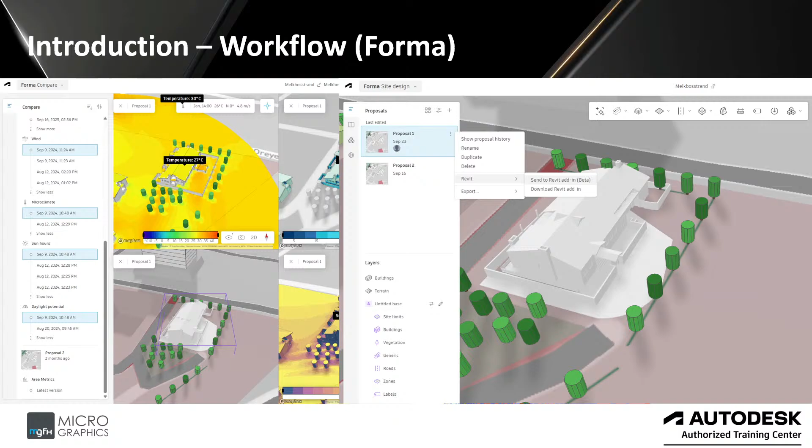Here's an example of the different types of analyses that one would be able to do. This is what it looks like within Forma. You're able to compare different proposals as well if you decide to make a change to the building, to change the orientation, the placement of the building. What would the different factors be like on your site?

Top left, you see the temperature, then the source score. The second one shows how much, what type of glass one would have to place, what's the best use, what type of glass. Then you have the solar power, how much kilowatt hour per square meter you could generate if you placed solar panels on the roof, for example.

Then you have your area metrics at the bottom left. Then you have your sun hours at the bottom middle, per day—you select the day and month of the year, and you can see how much sun exposure you get. And then your wind speeds, in meters per second.

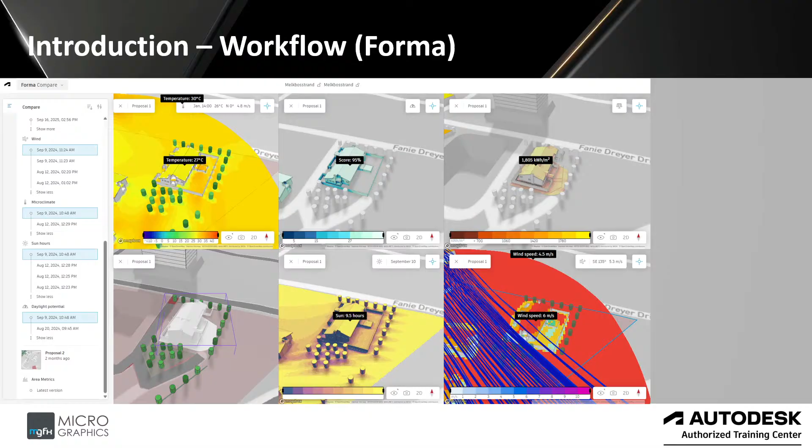So this is how I would suggest one would do it. You would go into your Autodesk account. If you have the AEC collection, you would go look for Forma, and you can access Forma through your Autodesk account.

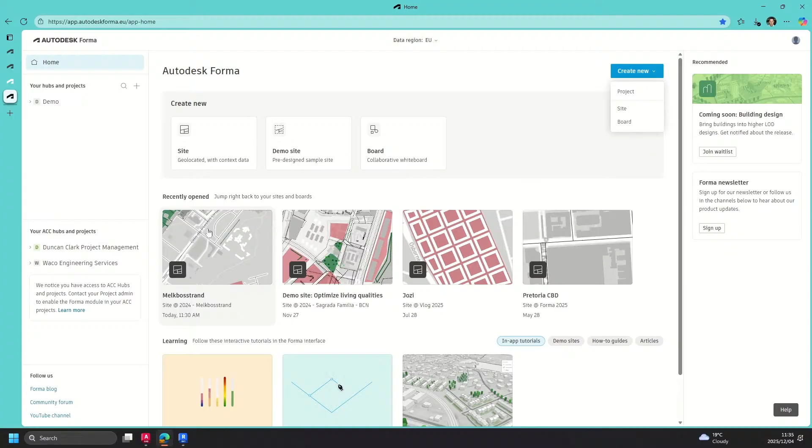I have saved my Forma as a favorite on my favorites tab. You have your hubs, your projects, and your regions which you are part of. So you either get invited to a project or you create your own new sites, demo sites, new projects. And then you have your recently used projects, all connected through your Autodesk Construction Cloud Docs hub.

You can create multiple proposals, as many as you require, and design the different types of buildings that you need. If you want Forma's default line building, basic buildings, you can, or you can sketch your own in 3D. I've placed all the different types of buildings here just to show examples of what you could do.

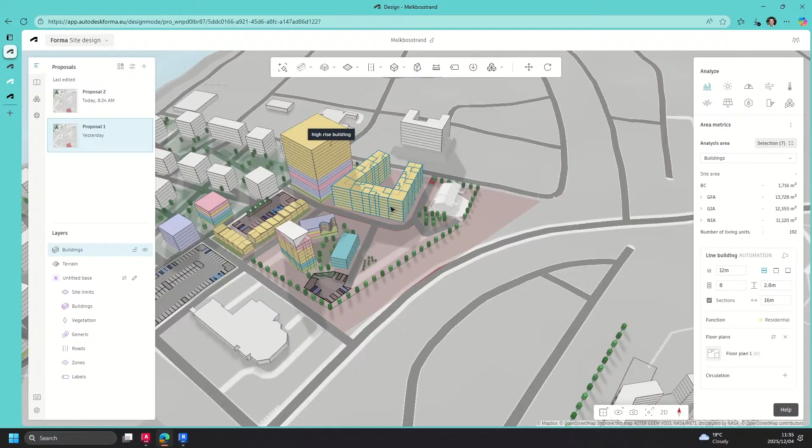Within your buildings, before you even start with your Revit detailing of your structure, you can draw your own layouts, and get an idea of what, where you're heading.

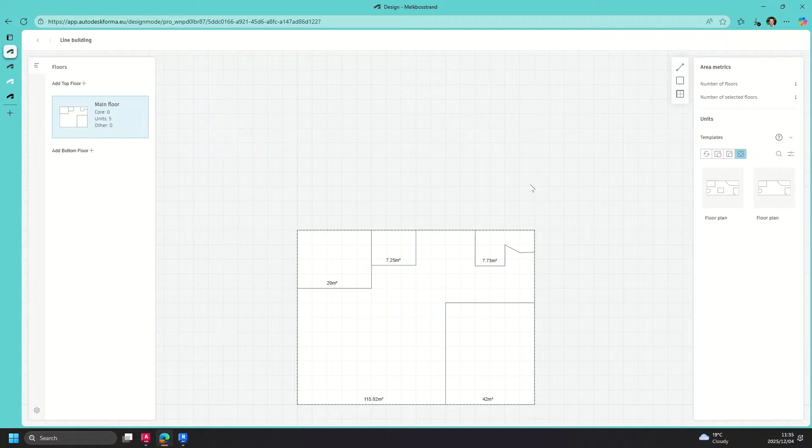You can place multiple different iterations of floor plan types, window placements for the best orientation, best sunlight, those kinds of things, and then it models it for you in 3D. Once you send this to Revit, those lines that I drew become walls, actual 3D components in Revit. You can swap them out for different types of walls.

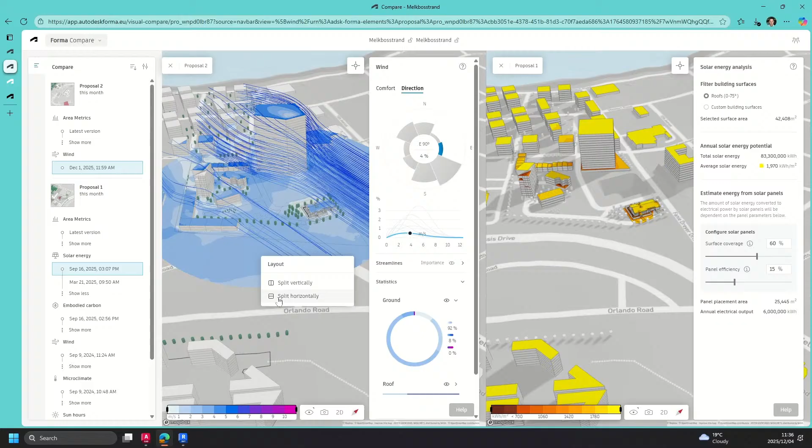Here's an example. I'm taking my proposal 1 and proposal 2, two different designs, and comparing one versus the other, one to the left and one to the right, to see how the factors were updated when I made a change to my building. You're able to right click and split the screen to add more analyses to compare and view.

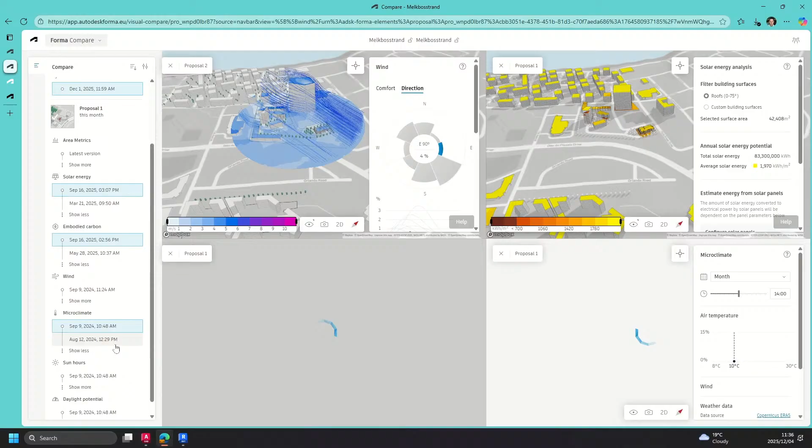There's your solar energy, how much you could generate. Selecting just that building, how much energy can you generate on average. On the left we have our wind. There's an inspect tool, so you can place spot inspections to see what the wind conditions would be like surrounding your building, on your building.

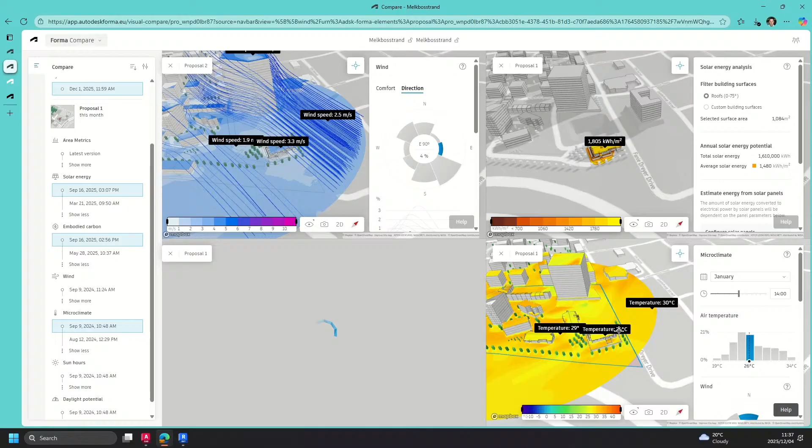And this is all pre-conceptual stage, right? There's no design yet. It's just an idea of understanding the site first.

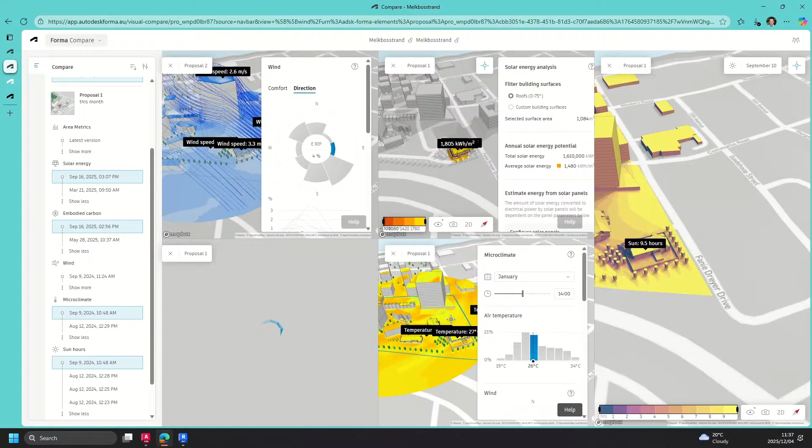Then we have our sun hours. On September 10th, you have 9.5 hours of sunlight on that roof. The temperatures will be roughly 27 degrees. This is based on your local weather data systems. So this is done in Melkbosstrand on the Western Cape coastline, South Africa.

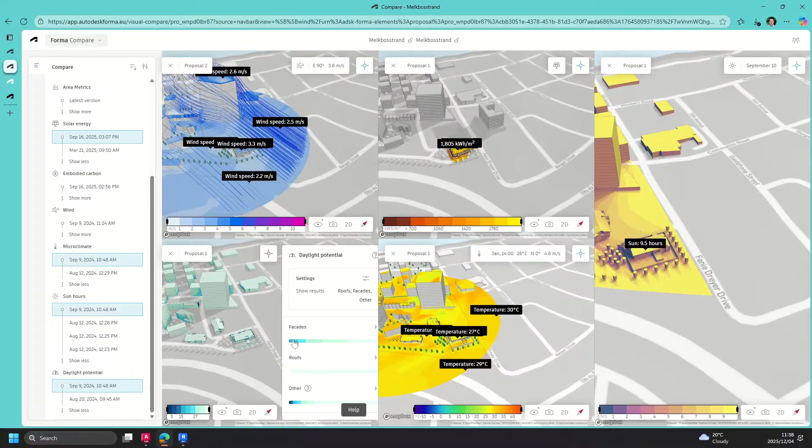Daylight potential is based on roofs and facades to see what it's like. At the bottom there's a score that shows you conventional window designs should be satisfactory. So single clear glazing should be satisfactory there, no need for double glazing in the type of temperatures that you receive there. It doesn't go into the minuses with snow and those kinds of things.

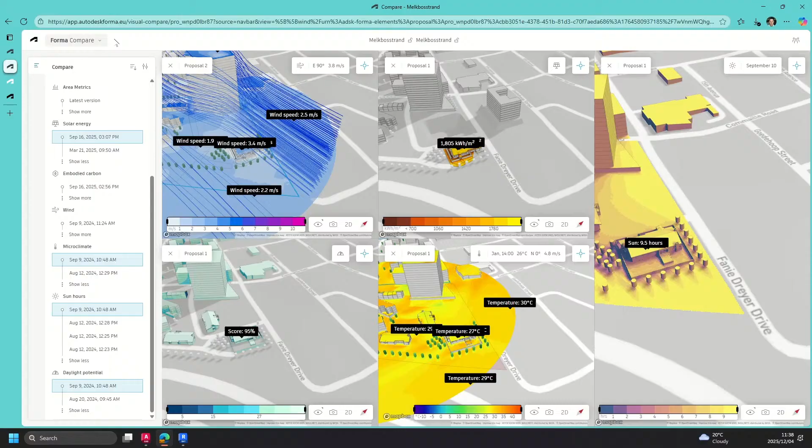Going back to the site design, with the drop down there's the add-on. You can download it there and then send it to Revit. On the right hand side is where you select which type of analysis you would like to do.

There are also additional extensions that you can download for free, a lot of them are for free. That's an example of the parking metric test fit, which designs parking spaces for you using AI.

There are some of the ones that I've already added. And if you click on add extensions, you can go look for other ones that are available. These are just the defaults that are here, but you can go to the Autodesk App Store online and look for more.

ArcGIS information, generate 3D building design options with the most advanced 3D generative AI, ArchiStar. So it generates the buildings for you with your inputs. You say 3-story building, office block, that kind of prompt.

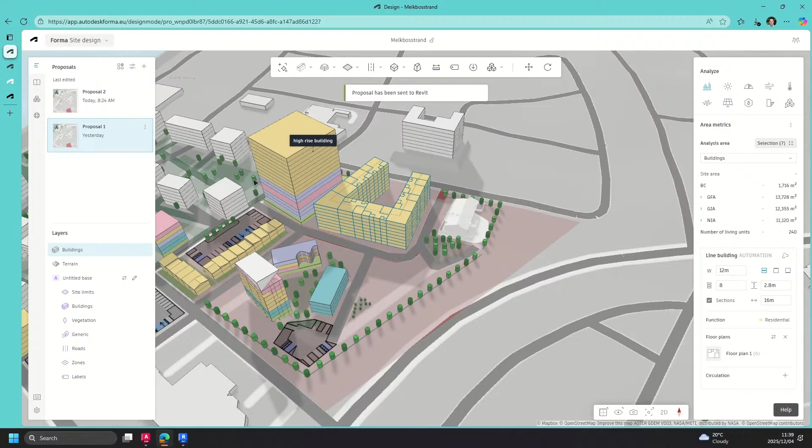And then there's Veras, which is a brilliant AI visualization tool for short videos and still images, which I will show you during this webinar. So let's send this to Revit, and then I can show you what it looks like once you've loaded it into Revit. That's the end result.

That is where you would find it on the Massing and Site tab. Once you've added that plugin, you can load the proposal into Revit from Forma. You can also update the proposal, and you can also unlink it once you're done with your analyses.

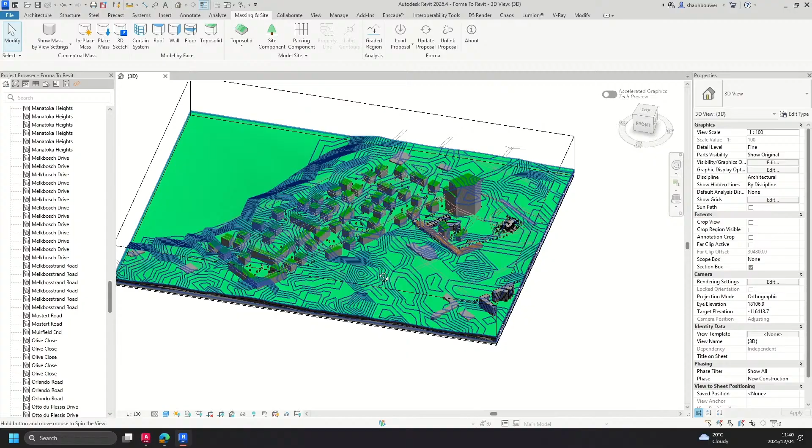What is quite brilliant is it brings in contours and everything already. So before you have your site surveyor sending you data for contextual information like the contours, how the site falls, what the conditions are like, at least you have a really good starting point, right?

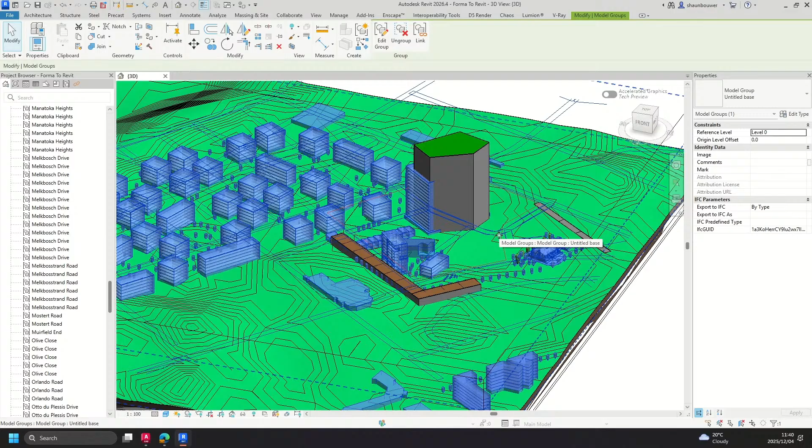At this point, it would bring in roads and existing buildings by their name in groups. So you can decide which ones you want to keep, which are relevant, and then you can remove the ones that you don't want.

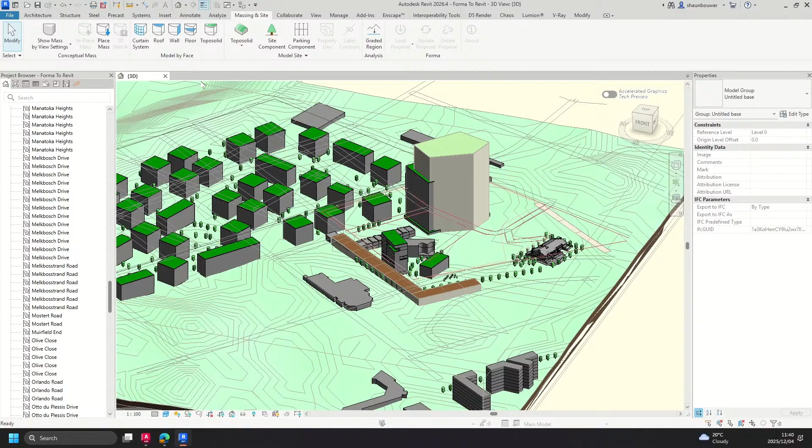And then what I did as one small example there on the right hand side next to the house on the far right, I made the roads that I brought in an actual path, an actual road in Revit. So I converted it using the pick line tool, so you can then model the street and the landscape inside Revit.

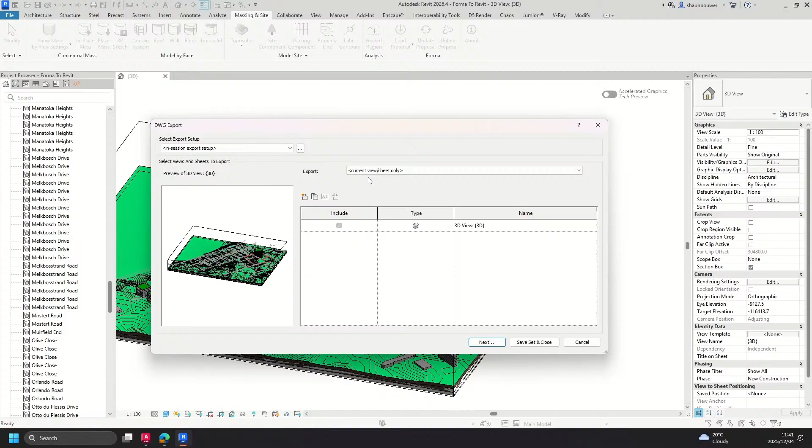With that, then you can send it to DWG format, so you can use it in AutoCAD, Civil 3D, or other software packages for further development, cleaning out the contours, making it look nice and neat. You have control over the layers, assigning the layers to them.

And then that's what happens. In AutoCAD, this is an AutoCAD example, and I'll use Civil 3D for this example.

Place your geolocation, go search for your address, where the building is. You have different map views you can select, street maps or satellite imagery. Edit your location to be exact, make sure you're selecting the right place, and select the correct coordinate system. I used the Hartebeesthoek coordinate system.

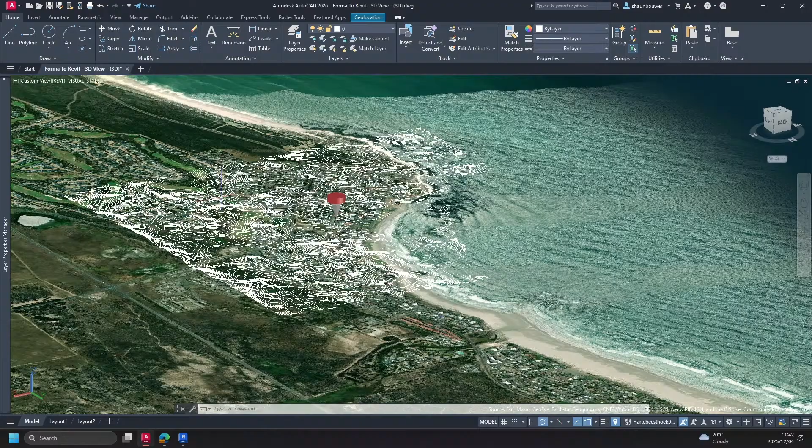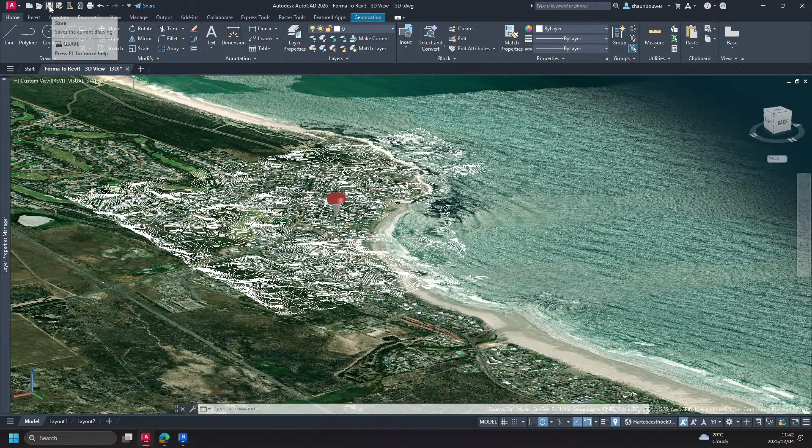With this, you have a really good start without having to have multiple consultants working on the same thing. I did this all by myself. So the idea is you can start with a very nice base point, having the right site data, understanding what the winds are like, the sun exposures, all the environmental conditions, and you're ready to kickstart your sketch plan or design phase.

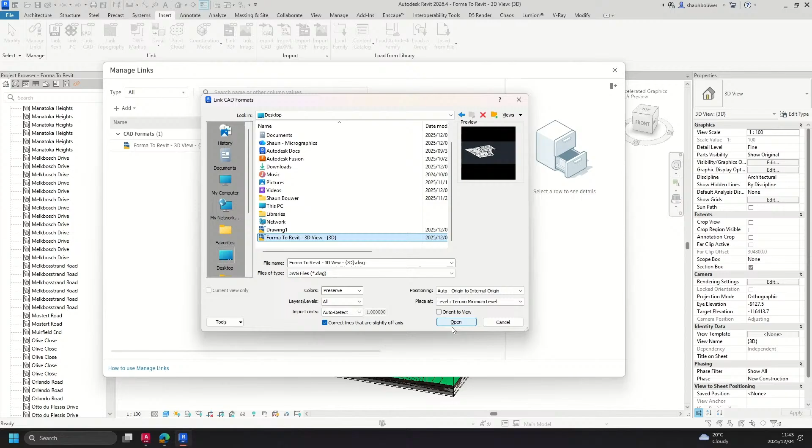Once you've made your changes in AutoCAD, you've updated the layers, cleaned it out a bit, just cropped the area that you require. You might not need the entire Melkbosstrand as an example in this project, you don't need the entire city, you just need your block or just your erf. Then you can go and crop it out.

When you reach this point, one would want to start creating a centralized model, right? You want to save it on the construction cloud. You have the choice within your network or in the cloud. I'm doing it within the cloud so that we can connect with multiple users from multiple different disciplines and software packages collaboratively, wherever they are sitting, whether they're on the same time zone, same continent or not. We can all work together on the same project at the same time.

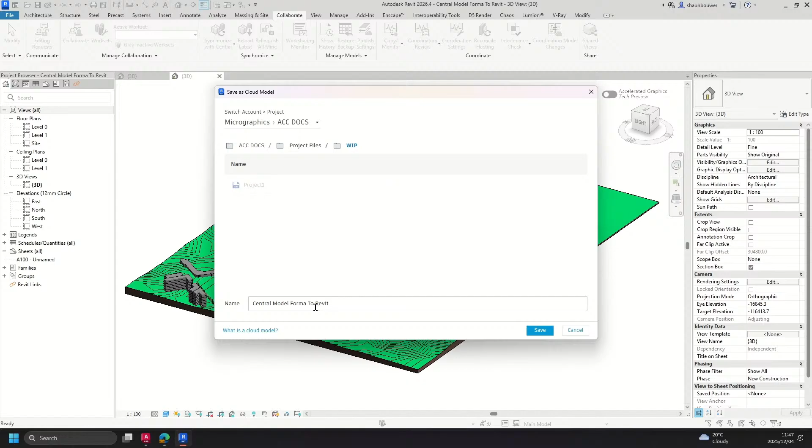Okay, select your hub and the project. This is my Autodesk Construction Cloud Docs Forma example project. So I'm just creating a central model, a centralized cloud worksharing co-author model, so multiple people can work on the same model at the same time.

With that, we have a cloud model. We can go create worksets now. You can do this before the time or after the fact, and you can add a few worksets. Give every discipline or team member a workset by category, it's up to you how you define them. I prefer doing it by discipline, so every discipline has their own model to work on, or their own workset to do their part.

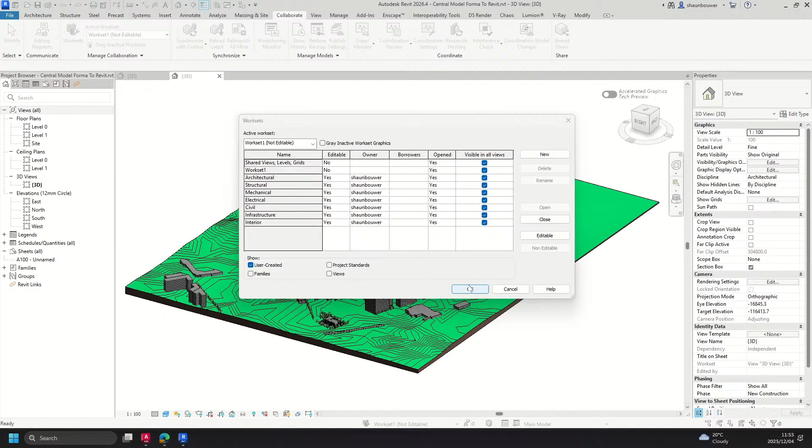So architectural, structure, mechanical, electrical, civil, infrastructure, and interior. For this, I will do the architectural part. And there we have our base model.

Now what one would do is each discipline would have their own model. All of them can be linked into the main model where maybe the topography lives, or you can use the architectural model as the main model, depending on your circumstances, scope and project needs.

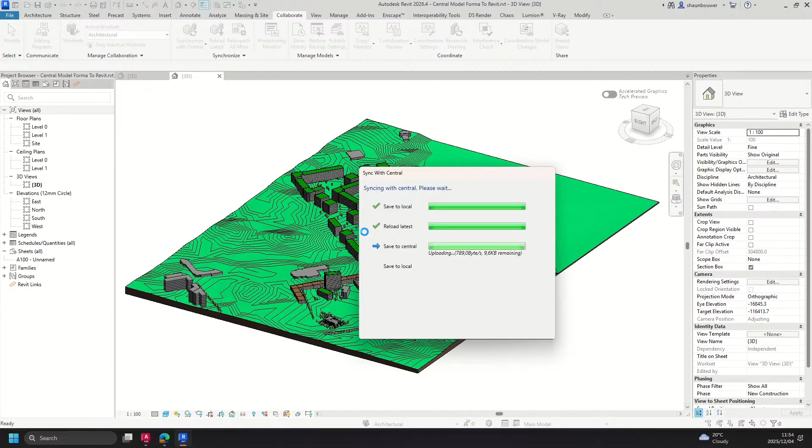And then each person can go within their own worksets and their own models and start collaborating. So here's my architectural model. I further defined what I did with my conceptual mass that came from Forma, and I converted those walls and elements into actual Revit geometry.

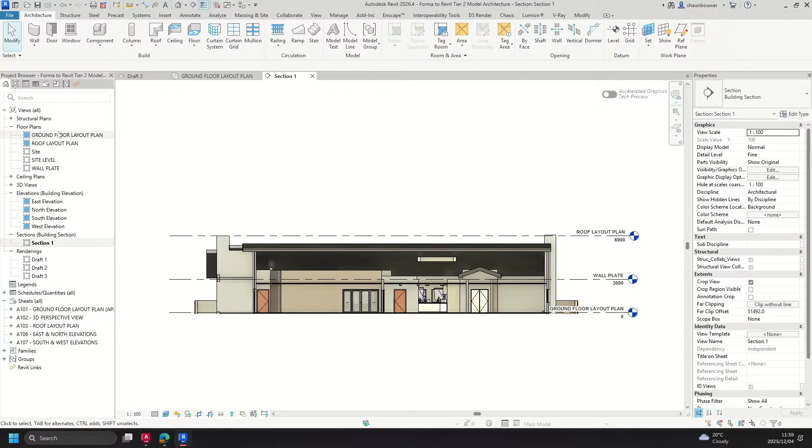And here you have an example of your building. So instead of it just being a shell, we have all the internal elements as well. Then you can do a nice draft render in Revit using the Revit renderer, or you can do cloud rendering as well if you need be, or Twinmotion. It's an option, now available within your AEC collection.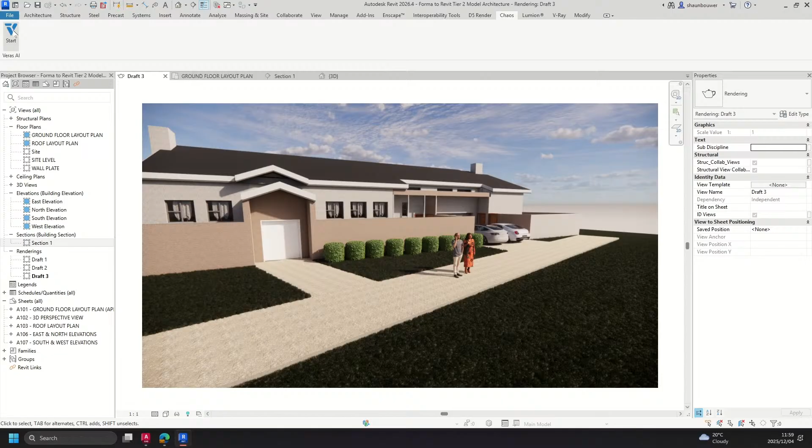Then you have additional ones: V-Ray, Lumion, D5 Render, Enscape, and so on. But for this exercise, I'll be using Veras, which is from the Chaos Group and Evolve Lab. It's an AI tool that does all the settings for you for the rendering. You basically select an image that looks like the way you want it to look, and you click render. That's about it, so it's a very, very easy, quick tool for pre-conceptual design things.

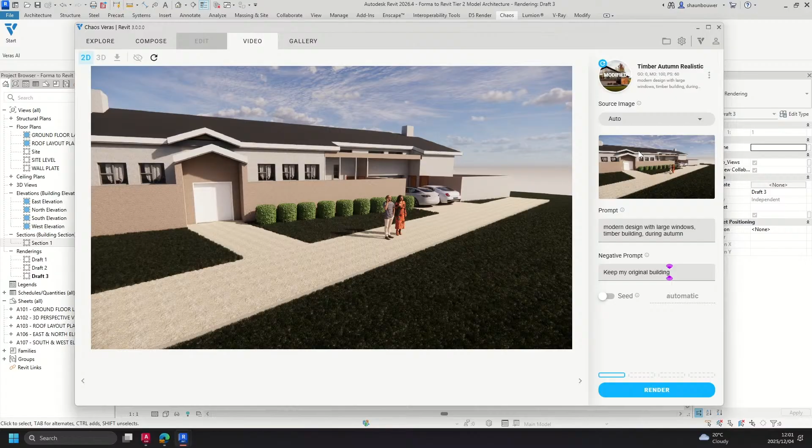If you're on the Compose tab, you do have the option to do a prompt, the way you would Google search or talk to ChatGPT. You just type in a prompt, what you want, and a negative prompt, saying what you don't want changed. So I said keep my original building. You can add more geometry if you ask it to add more things, and you can just specify it in the prompt. Here are some examples.

These renders just take a few seconds, usually between 5 or 10 seconds, and it gives you a really nice idea of where you're heading. And all of this started with just a conceptual mass in Forma.

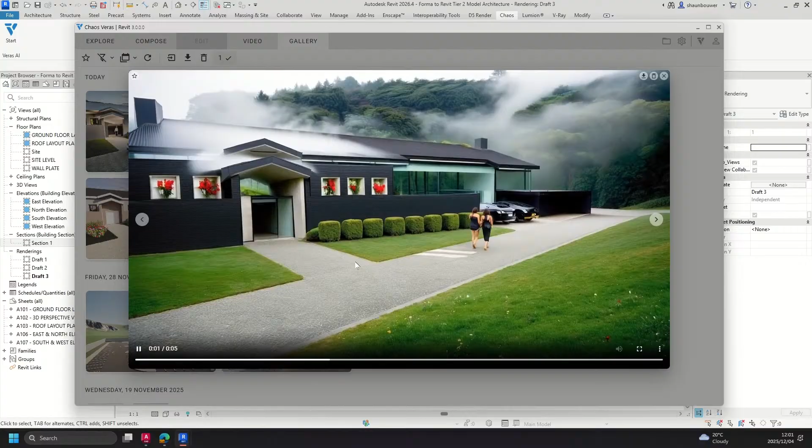So within one day, you already have something to present to the client saying, this is where we're heading. Are you happy with it? Is this the look you're going for? But more than that, you understand contextually what the site is like, the environment, the sun, the wind and the microclimate in your specific area, geolocated data based on actual weather data systems. And this is all run with AI.

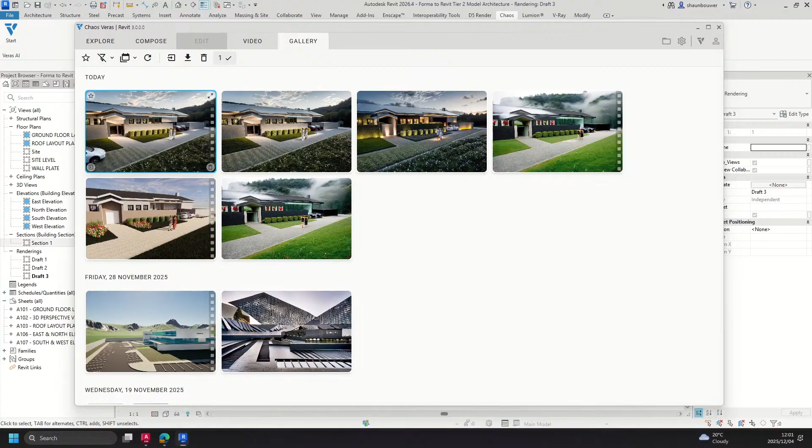So it's quite brilliant how quickly one can get to a conceptual stage, which used to take much longer. We would go to site and do a lot of calculations and things there on site. Alright, then once you've reached this point, you would have all your different formats and files linked.

Your Revit files for the different disciplines, or your DWG files for multidisciplinary coordination. Now it's time to develop your BIM project in Revit with construction documentation, doing interference checks and aligning the different disciplines with a cloud model to keep everything coordinated.

So once detailed construction documentation, all disciplines are complete and ready for construction, then one would use that visualization tool to generate more accurate representations of your building. With Veras, you can do still renders, panoramas, and videos, and it takes seconds with Generative AI.

So looking at this construction documentation slide, these are the different types of detailing views that are available within Revit. You get floor plan views, ceiling plan views, elevations, sections, callouts, drafting views, detail views, and 3D detail views.

And for floor plans, those are horizontal cut views through the building. The level of detail generally is from coarse to fine, depending on what you're trying to show. The use cases would be general layouts, floor assemblies, finishes, and fire ratings.

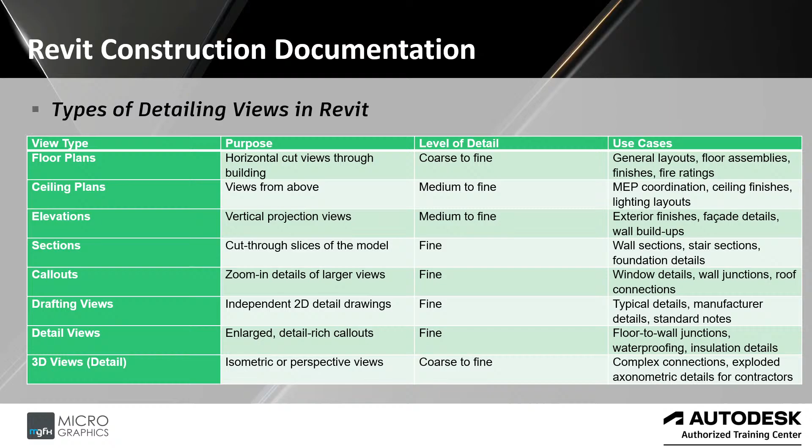And then 3D views for isometric or perspective views from coarse to fine. Okay, so here are 3 examples of the different types of views when I referred to the drafting detail view and callout view. So the functions and tools for detailing Revit.

While views are important, the real power lies in the detailing tools that Revit provides. So what you actually have to place them. We have detail components, line work tools, which are the same as the draw and modify tools within AutoCAD, filled regions similar to the hatch patterns in AutoCAD, detail lines, tags and annotations, keynotes and keynote legends, detail groups, drafting views, and then view templates and filters, and detailing in 3D.

So to the left there, you would have just that would be the detail view. So it's a drafting view. So it's not connected to the actual building. You would draw all of those elements using repeated components or in-place components that you would draw in 2D.

Then you have the middle one, which is a call-out view. You would go and zoom in on a space, crop it out, and use the 3D geometry and then place 2D elements on top of it to resemble, like for example, the rebar and the connection. Add your multi-leaders, your specifications, your annotations, dimensions, and so forth.

And then you also have the ability to do text and multi-leaders in 3D. So you can go do a section box, save your 3D view as a different view name. For example, this could be the 3D staircase, multi-story staircase, and then you can place text, which is nice to see on site for the contractors, what it must be like in 3D.

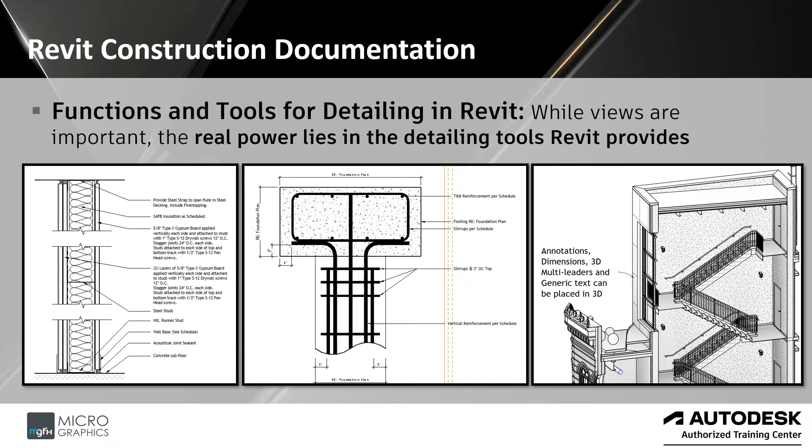So the introduction workflow is ACC plus Revit plus CAD. That's the life cycle. Forma can be accessed through your Autodesk Construction Cloud Docs account. Members can be invited, and the project can be shared between all relevant members. Forma is an online application and no installation is required.

The minimum requirement is access to the AEC collection and an invitation to the project, whether you're creating a project yourself or being invited to one. Using ACC with Forma, Revit, AutoCAD Civil 3D, Navisworks, and the other AEC collection software helps you collaborate effectively.

It's about aligning your designs, right? So within Revit, instead of using your open model or new model option, you would use your Autodesk projects to the far left of the screen, and that is where all your cloud workshared models would live. For everybody to gain access, whenever they open it there, they will create a local copy of the central cloud workshared model.

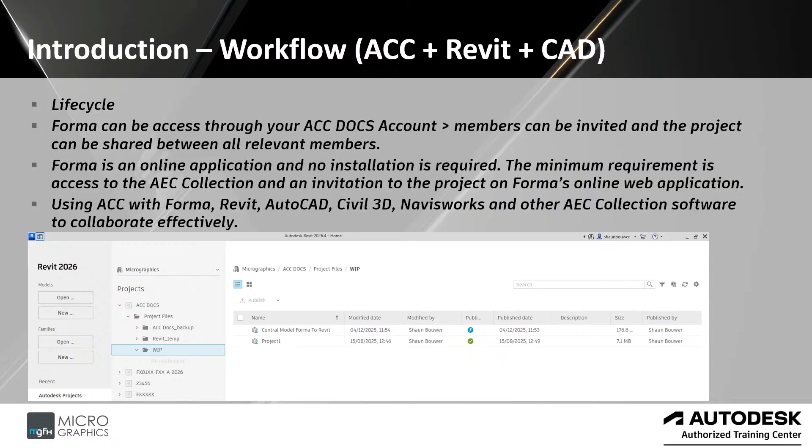AI-powered design in Autodesk Forma - the generative and AI design driven features. In addition to its intelligent analysis tools, Autodesk Forma now includes an incredible AI-powered rendering feature, which I showed briefly. Now within Revit, it is also available in Forma. So both of them, the use is the same.

The new capability uses AI to generate photorealistic renders directly within the Forma environment, instantly transforming simple massing or conceptual models into realistic scenes, complete with materials, lighting, and context. What makes it so powerful is how it integrates seamlessly with Forma's real-time environment analysis tools.

As you adjust the building's form, orientation, or materials, you can see not only how the performance changes, but also how it will look in the real world. By combining performance data and visual intelligence, Forma allows designers to communicate ideas more clearly, gain stakeholders' buy-in earlier, and maintain sustainability as a central focus before a single line is drawn in Revit or AutoCAD. And because everything connects smoothly into Revit, the AI-generated design intelligence carries through to the entire BIM process.

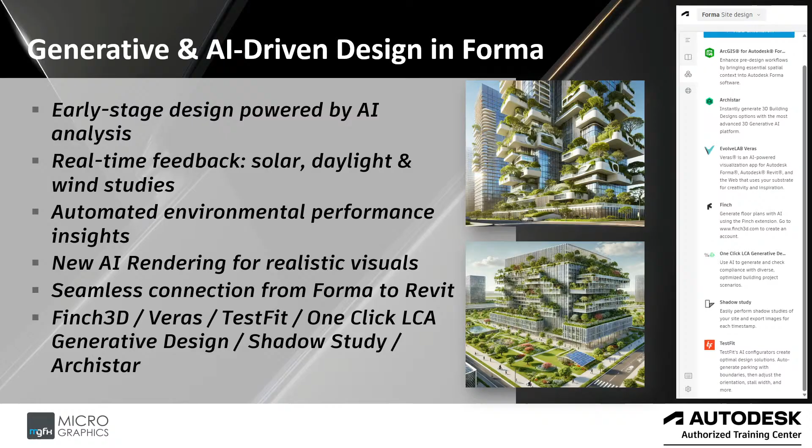Here's an example of Veras inside Forma. If you run Veras there, you can also try the trial out if you just want to see how it looks. So to the left are my buildings - I didn't draw a single one of them. I used AI to generate all of the buildings for me to the left. Some of them are existing buildings of the actual area that I selected on the map, and some of them are generated by input of the AI. I think it's called ArchiStar - it generates it for you.

As I mentioned in the previous slide, this is just an example of Veras from the Chaos Group and Evolve Lab, which generates fast renders - it literally takes seconds, with possible scenarios based on your prompts and input. So I asked for one based in the fall, so it would use this sort of color scheme. Then you can input multiple different prompts, and do multiple renders at once - you can do 4 at a time.

And with this, you can share it with your clients, shareholders, stakeholders, owners, or other members of the team to show in which direction you are moving with this project - what is your idea, what is the preconceptual idea that you're heading towards. This is at the preconceptual design stage before any lines have been drawn in AutoCAD or Revit, to get all members excited and have the right path set out for where the project is heading, and get buy-in from the persons involved with the project.

Collaboratively connected through the Autodesk Construction Cloud using the Autodesk Free Viewer. For those members who do not have Autodesk subscriptions, it is a free online viewer called the Autodesk Viewer, accessed via the web browser. So you can do it on a cell phone, a tablet, or any device with internet access and a web browser installed. Then they can view it in 2D and 3D, and your clients can see what this building, what you're suggesting. This is the idea that you're heading towards.

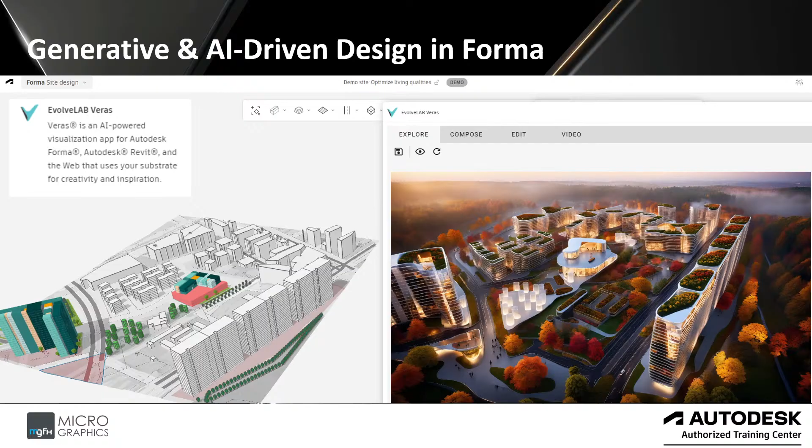Meaning your preconceptual ideas have been presented, discussed, and you have the go-ahead to start the design phase. With all these AI tools, which assist your design with speed, compliance, mandates, regulations from local authorities, layout suggestions, and more, you can send it to Revit. Make your changes in Revit, use phasing and design options within Revit. Those changes can be sent back to Forma for reanalysis, to see if the changes you made are now better suited for the site you are working on, the wind conditions, sun hours, solar exposure, and so on.

Proposals can be reloaded in Revit in the Massing and Site tab, so you update the proposal from Forma in Revit. Your Revit model cannot be sent directly from Revit to Forma — you have to export it as an OBJ format to reload it into Forma, but you can reload it into the same proposal. So you delete the massing structure in Forma and then replace it with the OBJ format you've imported, and then rerun the analysis to see if those design changes helped, made it easier.

Then there are more generative and AI design driven options. Previously I did discuss Finch — there's an explanation there you can read to see how it makes your life much easier. What's nice about Finch is that you can load previously used layouts. So let's say you did a 2-bedroom unit or a 3-bedroom house at some point — take those layouts and save them on Finch, and then you can just swap them out quickly with your own designs, your own design style. You don't have to use the design style that the AI suggests; you can stick to your own concepts and your own design.

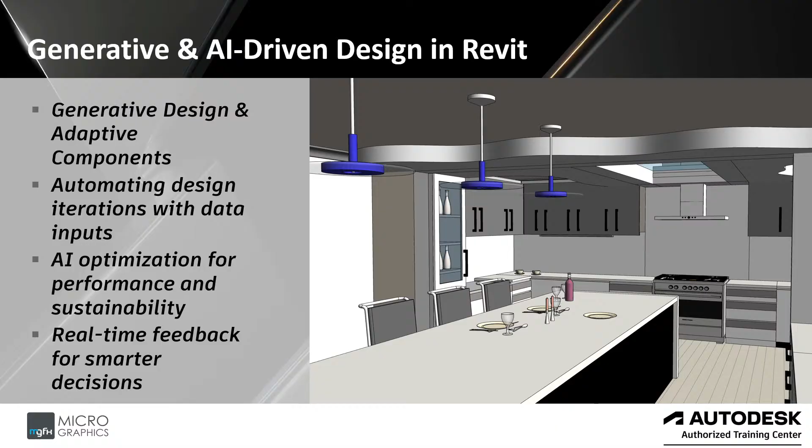And then what's pretty decent is that you can go and create a nice video that you send to your clients. This took about 12 seconds to create a short 5-second video. It's quite decent. And this is all based on just this—this is the part that I did. The rest was given to me by AI rendering.

Then other AI-driven design options that you have within Revit. So if you look on the right-hand side of the screen, you'll see you can input a prompt. So you can talk to Revit and ask it to draw for you. Instead of selecting the wall and the floor and the ceiling and the lighting and the elements, you type in the prompt. It's called Pele AI.

It's an AI-powered assistant designed to revolutionize the way you work in Revit. So it doesn't automatically generate something for you—you have to give the prompts. You're speaking to the computer saying, draw a floor, this is the area square meterage, or 7 meters by 5 meters, it's a concrete 170 slab. You have to specify what you want. The idea is to keep it simple though, one sentence at a time.

You can go download it and try it out. There's the description of Pele AI, it's on the Autodesk App Store. Using cutting-edge artificial intelligence, Pele enables you to interact intuitively with Revit. Simply write or describe your task, and Pele will try to understand your needs and execute the work seamlessly, whether it's generating views, creating dimensions, organizing elements, graphic overrides, view templates, or running custom commands. Pele reduces the hassle of complex, tedious operations.

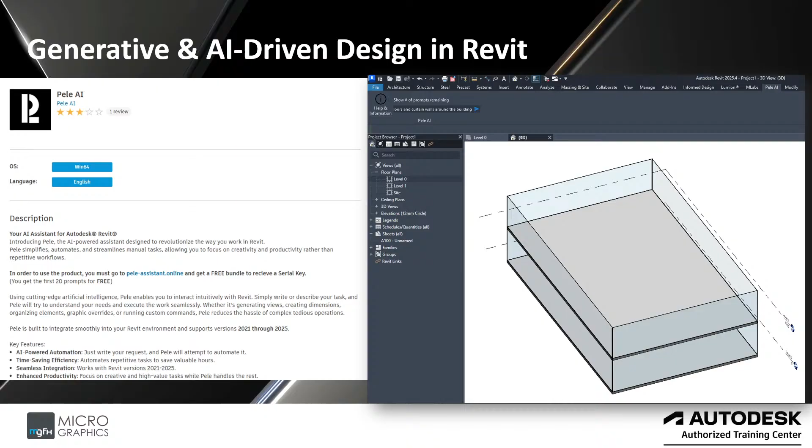Okay, looking further now, including Revit and AutoCAD. The Autodesk AI announcement they made was that Autodesk introduced Autodesk AI, a technology designed to enhance creativity, solve problems, and eliminate non-productive work across various industries.

Capabilities would include: Autodesk AI provides intelligent assistance and generative capabilities, allowing users to explore and produce innovative results efficiently. Industry applications include architecture, engineering, construction, and operations. Tools like Autodesk Forma and Construction IQ use AI for planning, design decisions, and risk management.

Product design and manufacturing: AI capabilities in Autodesk Fusion and Blank AI help in conceptual design exploration and automated manufacturing processes. Media and entertainment: AI is already in Autodesk Flow and Maya. It automates scheduling and creative tasks, enhancing productivity and creativity.

The future outlook: Autodesk plans to continue investing in AI with a focus on security and ethical practices, to drive better outcomes for businesses and the world. Autodesk is integrating AI into AutoCAD and Revit through several innovative tools.

AutoCAD specifically has My Insights, already available on your home page. It provides personalized recommendations and tips based on user behavior to improve productivity. It gives you a drawing history that uses AI to compare past versions of drawings, helping users track changes and understand design evolution. Then we have the new smart blocks to suggest the most relevant blocks based on usage patterns, saving time in repetitive tasks.

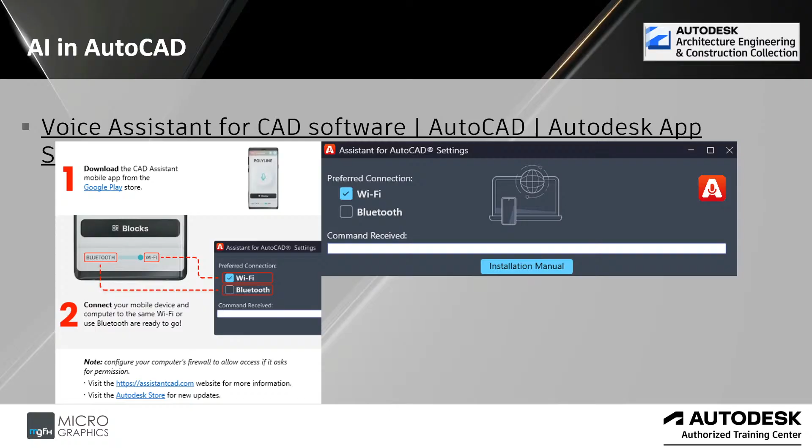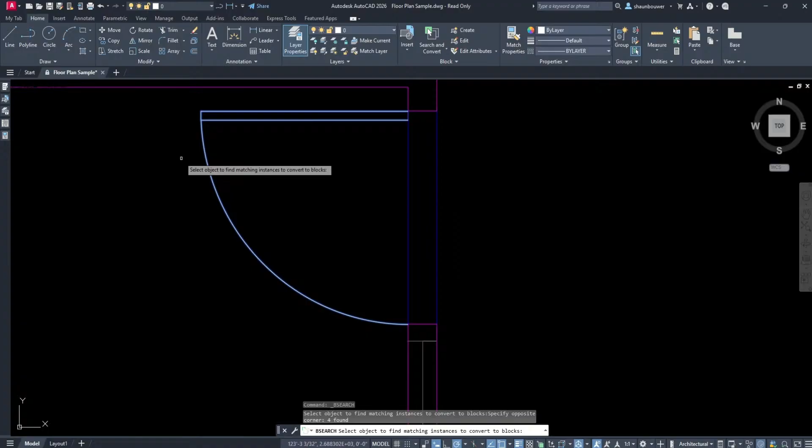So this would be an example of how one would go about doing this. There are two places, on the Home tab or on the Insert tab, on the block panels, where you can say search for geometry that looks similar to, and select what you want. It will go find all the other places in your model space that have the same or similar geometry, and tell you it found 4 of them. You can say include existing blocks.

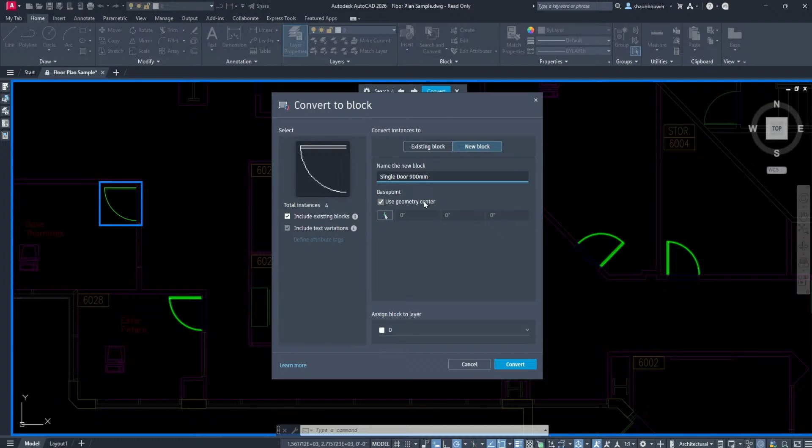There might have been already something that was like that and it was already in a block. Then you can decide at this point, add onto the existing one, find one that is existing and convert it into a block, or you can make a new block, give it a new name, put on a new layer, and new attributes and definitions. You can pick the base point, or it will take the center of the geometry. I like selecting the base point, saying where I want to have the grip to place it next time, and choose the layer on which you would like it to be. Then all of those individual lines were now converted into blocks unanimously.

There you have your grip. You can see on the layers properties, it's on the correct layer as well. And this way you can create your own block libraries and quickly convert the data.

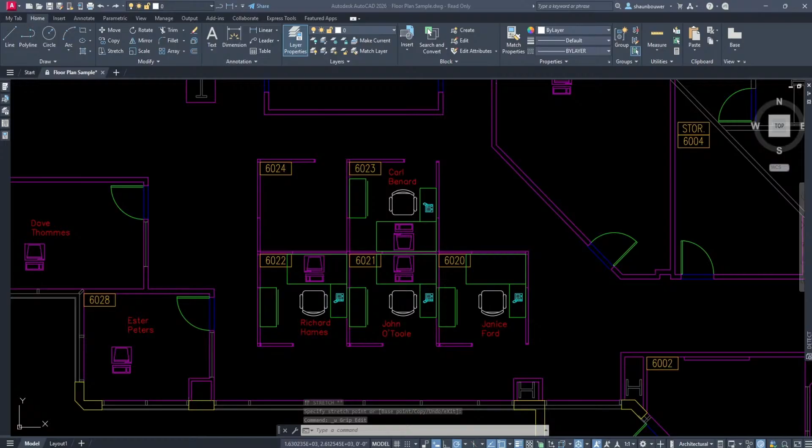Then detect and convert, with the additional option, to improve design efficiency and save time when cleaning up drawings by automatically recognizing the objects to convert into blocks with the help of Autodesk AI.

AutoCAD now includes additional controls to refine and modify the results with the new review toolbar. With the power of AI, AutoCAD now does the heavy lifting, finding repeated geometry and turning it into efficient, editable blocks. It's a huge time saver and a big win for cleaner, smarter drawings. If you haven't tried this feature yet, I highly recommend jumping into AutoCAD 2026 and giving it a go.

And if you want to explore more, check out the official help guide. So when you open that, you just press F1 and it opens the help guide, where there are some more videos and things that will assist you in using this.

So here, for example, I can go look for all the blocks, detect them, find them, and then it will go look throughout the entire drawing, the entire model space, for all of them that are the same, based on the one that I selected. There are 28 of them. Then you can decide whether or not you want to make an edit to that block, and it will update all of them.

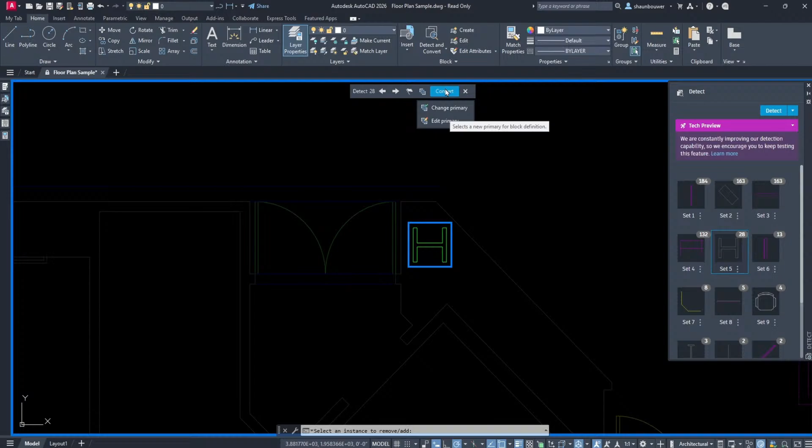Or you want to maybe explode them, swap them out, put them on a different layer, those kind of things. So what I'm doing here is I'm just selecting my I-beam, and I am going to go and change it to be something completely different. So just to be dramatic, let's change it to a bath.

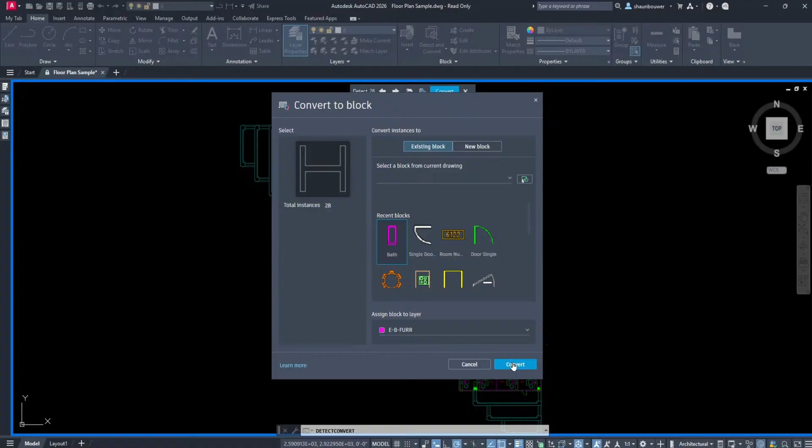So I will swap out all my I-beams for a bath just to make it obvious. Then determine on which layer it must be, so I'll make it a pink color so it's easily recognized. Once you do that, it will ask you just to make sure, is it the way you want it? Do you want to rotate it perhaps? Do you want to move it? Do you want to scale it? Do you want to make any adjustments to it?

You can make the adjustments as you need. And then if you are happy and you want it to be replaced, you can say OK, and it will replace all of the I-beams with a bath.

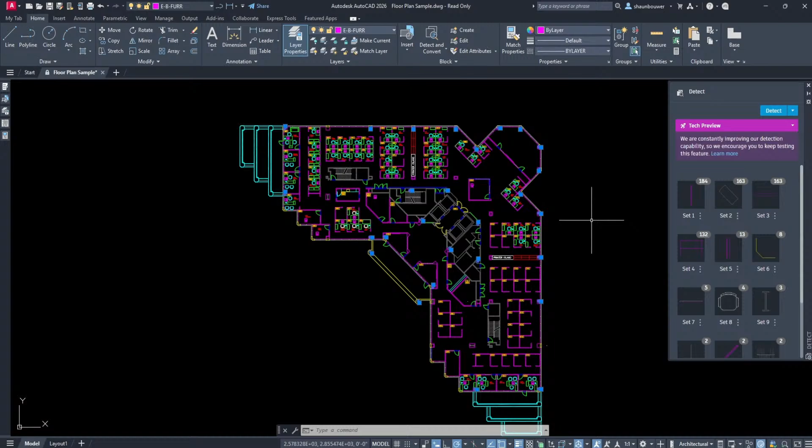So first you converted all of the I-beams, which were just lines and polylines, into a block, and then you selected all of them and swapped them out for the correct size or correct block type throughout your entire model space, instead of going to look for them one at a time. And you also now know that you selected all of them.

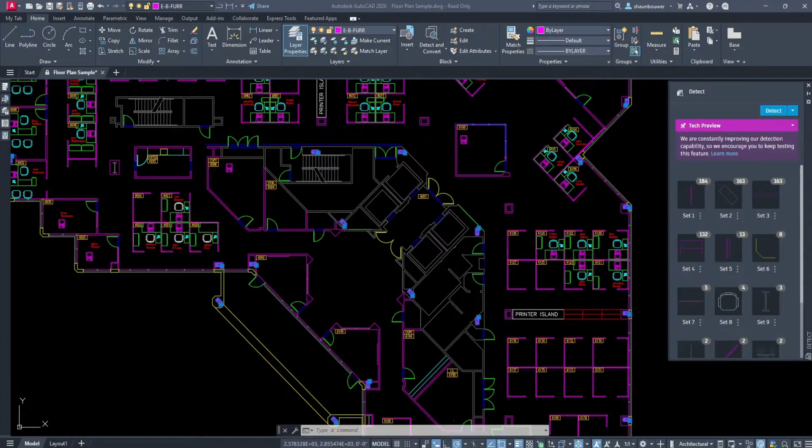So, how do I use the polygon tool? Then you will get either a step-by-step guide or a link to a video to see how the tool works. You can do this for all the different tools and functions within AutoCAD. It's a nice way to learn the software and enhance your understanding of it.

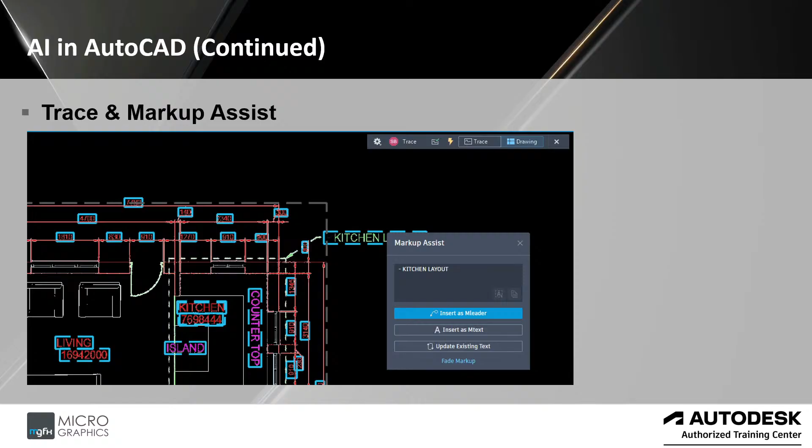So one would use Autodesk Forma for AI-powered design, for environmental analysis in the early stage—solar, daylight, wind, and embodied carbon insights. Then for optimization of comfort and energy use of the buildings, and then for informed decision-making before your BIM development.

AI is at the core of all the analysis and simulations within Forma. It has intelligent 3D modeling and sketch mode options, AI rendering for photorealistic visuals, as I showed with the Veras tool. Then you have smart collaboration using the Autodesk Construction Cloud and Docs, plus a lot of extensions and plugins that all use AI for advanced insights.

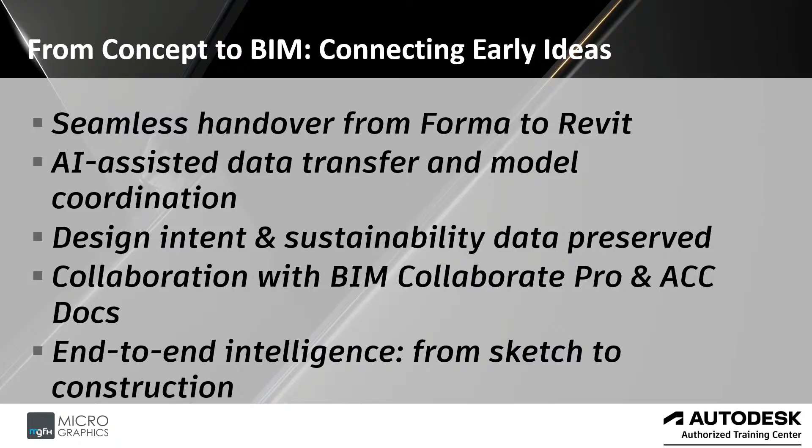This can be used from concept to BIM. So you would have Forma straight into Revit, Revit into AutoCAD and Civil 3D, Navisworks, and then all of this lives together on the Autodesk Construction Cloud using BIM Collaborate Pro. It has end-to-end intelligence from sketch to construction.

So it keeps the entire ecosystem connected using AI, all the way from concept to construction.

And then sustainable design in action—it's one subscription, the AEC Collection. It's one ecosystem; all of them are interconnected. They also have interoperability tools with each other, all connected in the cloud, with countless possibilities.

Any kind of structure can be done—we're doing a bridge, a kiosk, a house, or a yacht. Revit would be for modeling smarter, designing better, and documenting efficiently.

Forma is for analyzing the environment. Insight is for real-time energy and performance simulations. Civil 3D is for site and infrastructure design with precision. BIM Collaborate Pro would be for issue tracking, clash detection, and more.

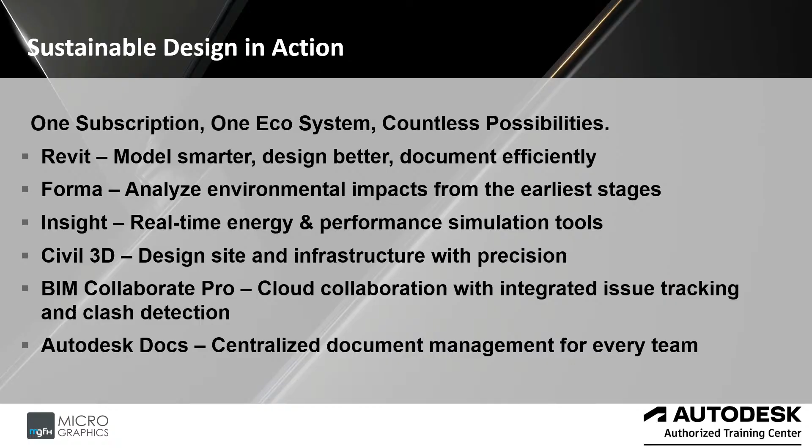And then Docs is where all the documents live in the cloud, for every team member to gain access to and work on the same model at the same time.

So key takeaways: AI enhances creativity, accuracy, and efficiency. Sustainability starts with data-driven design. Forma, Revit, and AutoCAD form a connected ecosystem. The Autodesk Construction Cloud unites every stage, and smarter workflows lead to greener outcomes.